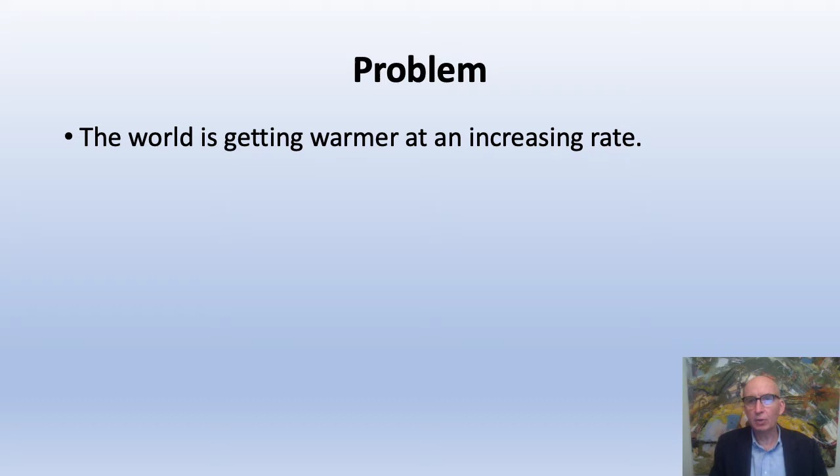The world is getting warmer at an increasing rate. Shown next is a short video segment that illustrates how the warming trend is correlating with rising atmospheric CO2 levels, and that these levels are continuing to rise at an increasing rate.

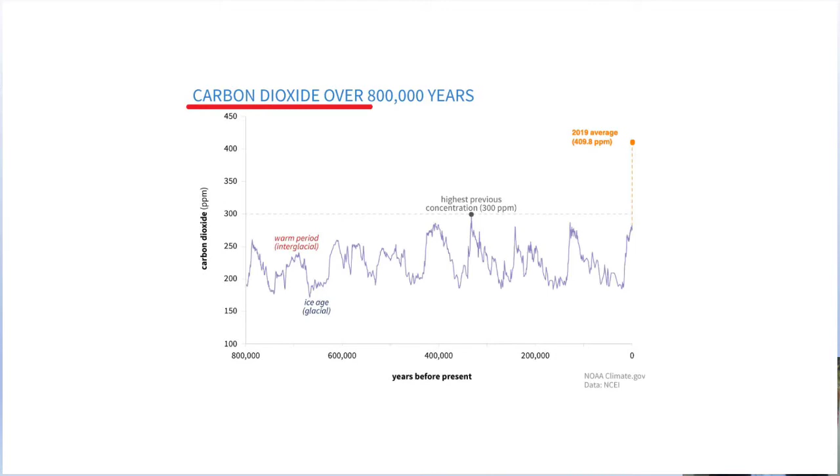The world is getting warmer and at an increasing rate. A large reason for this is CO2 levels in the atmosphere. Since the beginning of the Industrial Revolution, they have risen at an unprecedented rate. Rising CO2 levels have been correlating closely with rising global temperatures since 1880.

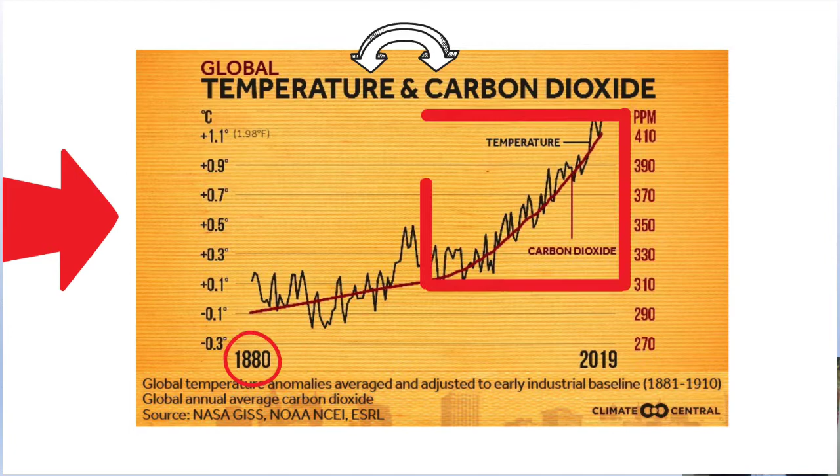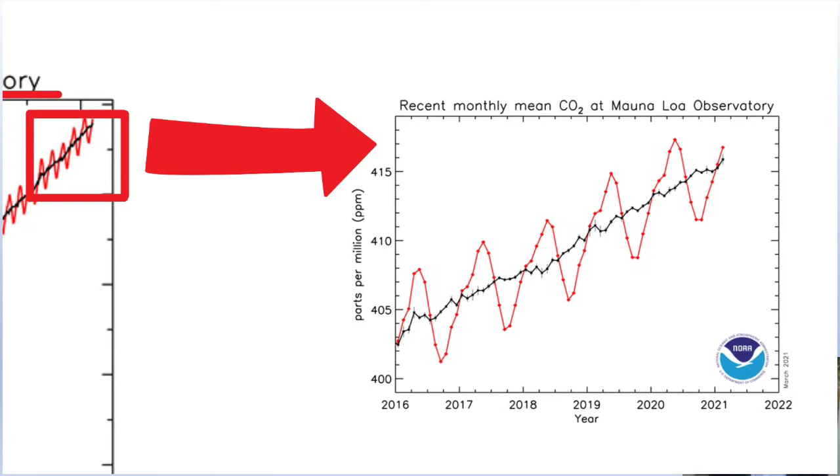This graph shows rising CO2 levels on a shorter timescale as measured at the Mauna Loa Observatory in Hawaii. On an even shorter timescale, you can see average CO2 levels have continued to rise despite a global economic slowdown from the coronavirus pandemic, which is shown by the black line. The red line on this graph shows the seasonal variations.

Why are these CO2 levels continuing to rise at an increasing rate? There are several factors contributing to this rising CO2 levels, but the main reason for this rise is that the total overall global energy demand appears to be increasing faster than the renewable energy generation growth rate.

Therefore, carbon emissions need to be mitigated on a much larger scale than what has been occurring. In addition to expanding carbon-free energy generating solutions as fast as possible, the world needs to implement carbon capture from existing fossil fuel energy sources on a very large scale.

Fortunately, there is now a proven breakthrough technology that captures 100% of the CO2 created when generating power from fuels such as natural gas, biogas from landfills, syngas from coal, and diesel fuel. It is called the Allam cycle.

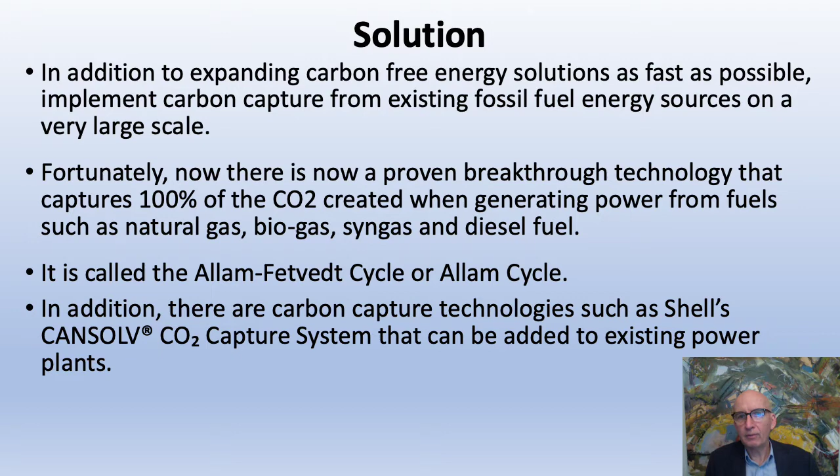In addition, there are additional carbon capture technologies such as Shell's CANSOLV CO2 capture system that can be added to existing power plants. The captured CO2 can be utilized for a wide range of uses, including vertical farming, as well as being sequestered in the ground.

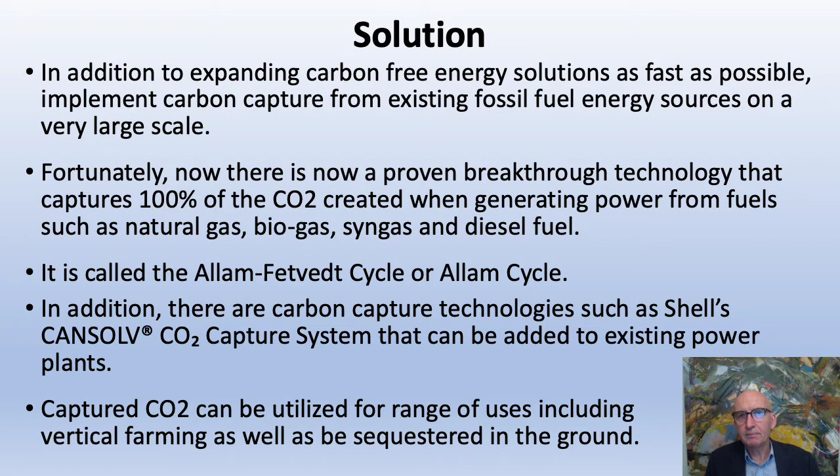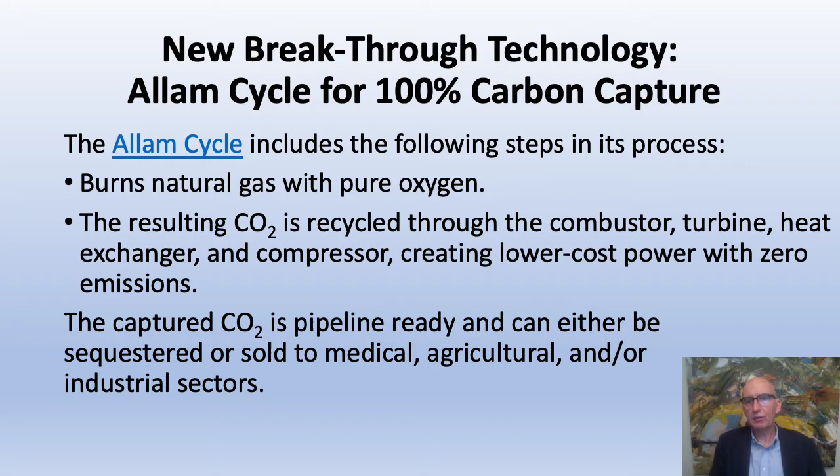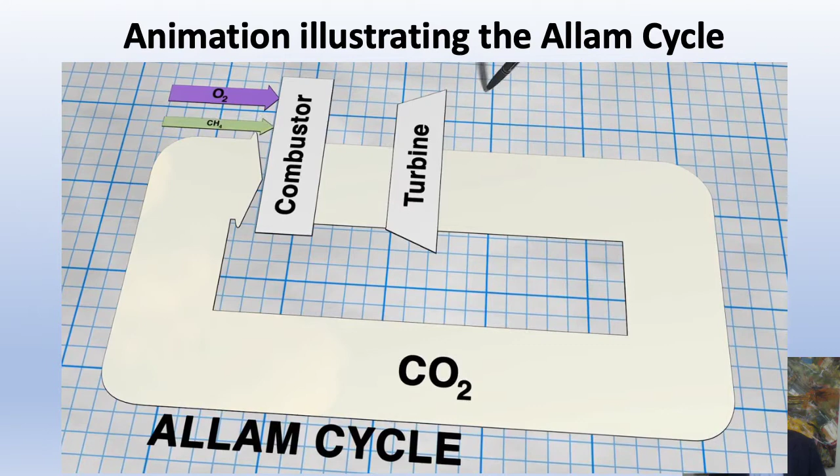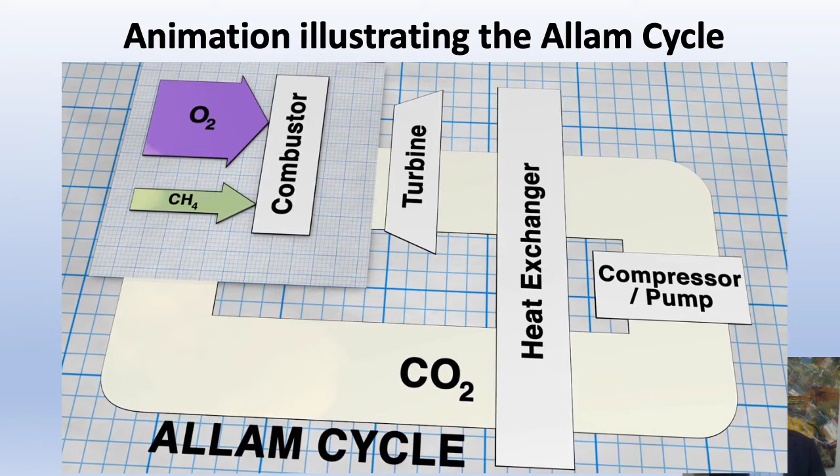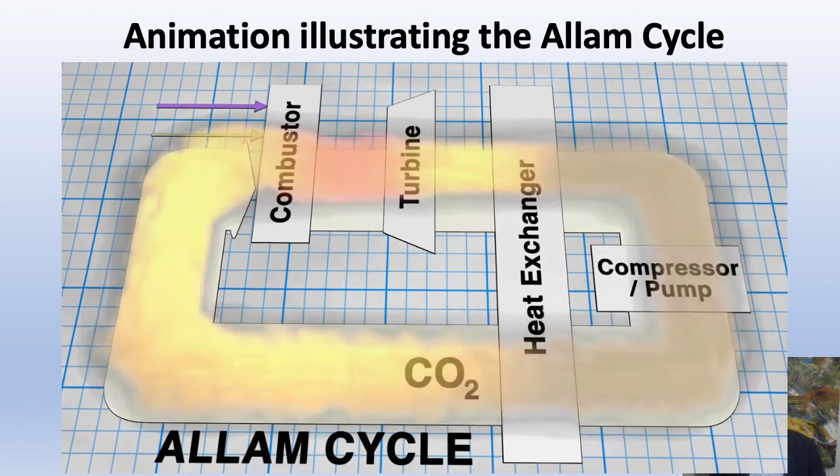Net Power uses supercritical CO2 instead of steam to produce power. Natural gas is combusted with hot, recuperated CO2 and oxygen, preventing NOx production. Burning with oxygen, known as oxycombustion, is typically uneconomic because oxygen is expensive to produce. Net Power overcomes this problem by recuperating the majority of the produced CO2 into the combustor, dramatically lowering oxygen requirements.

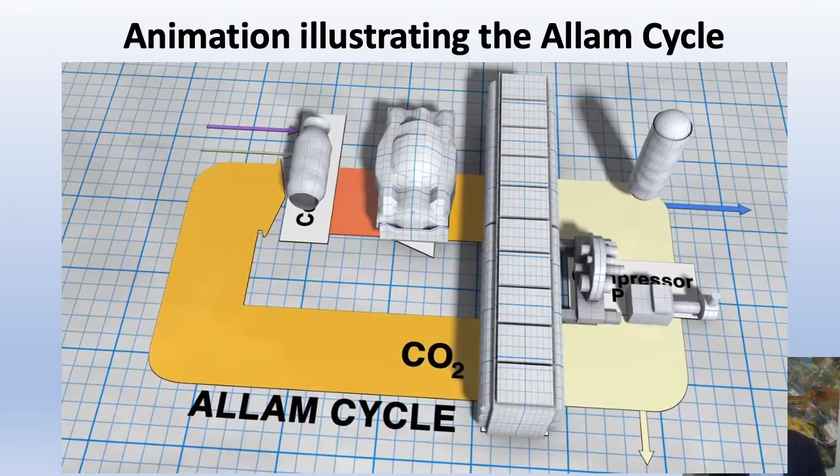The resulting working fluid of high-pressure CO2 and water is expanded through a turbine and then cooled in a heat exchanger. Water is removed, and the remaining nearly pure carbon dioxide stream is compressed and pumped back to high pressure. Excess pipeline-ready CO2 is exported before the working fluid is reheated in the heat exchanger and returned to the combustor. This breakthrough process produces low-cost electricity, eliminates water consumption, and is emissions-free.

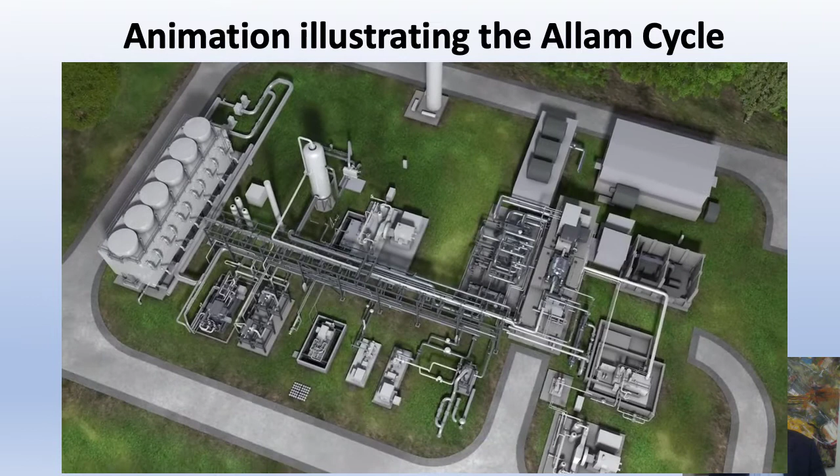The Allam cycle can be implemented on a global scale relatively quickly for several reasons. First, companies around the world can license this technology from Net Power, which is a privately held technology licensing company. The owners of this licensing company have considerable experience, capacity, and credibility in the power generation industry, which include Exelon Corporation, McDermott International Limited, and Occidental Petroleum, or Oxy.

Lastly, equipment manufacturers and contractors around the world that are currently supplying, constructing, and/or operating conventional power plants can also build and operate the Allam Cycle Power Plants. Therefore, capacity exists for rapid large-scale implementation of this cycle starting now.

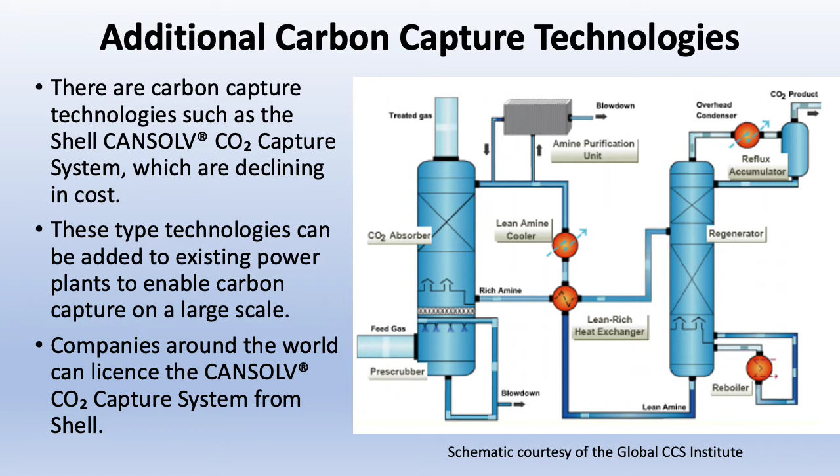As I mentioned earlier, there are carbon capture technologies such as Shell's CANSOLV CO2 capture system. This system is now in use in many locations and is declining in cost. It can be added to existing power plants to enable carbon capture on a large scale. In a similar way as the Allam technology can be utilized, companies around the world can license the CANSOLV system from Shell. Initially, CO2 captured from these power plants would be mostly sequestered in the ground.

However, once there is a reliable source of low-cost CO2 available, this CO2 can be used for many other uses, including accelerating plant growth in indoor farms, strengthening concrete building materials, and production of carbonated beverages. There are several sequestration options for CO2 captured from power plants, including injecting CO2 into oil and gas fields, into basaltic formations, and into salt caverns.

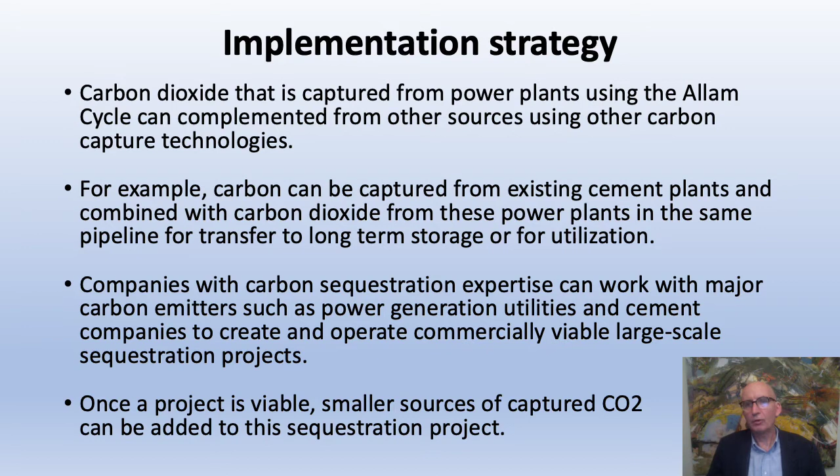Carbon dioxide can be captured from power plants using the Allam cycle, complemented by other carbon capture technologies. For example, carbon dioxide can be captured from existing cement plants and combined with carbon dioxide from power plants in the same pipeline for transfer to long-term storage or for utilization. Companies with sequestration expertise can engage with major carbon emitters such as power generation utilities and cement manufacturing companies to create and operate commercially viable large-scale sequestration projects. Once a project is viable, smaller sources of captured CO2 can be added to this sequestration project.

Power plants combined with carbon capture can help make an electricity grid that is also powered by renewable energy farms more reliable. For example, if wind power is not available for a few days, these power plants can provide the needed electricity. Since a power plant using the Allam cycle is very efficient and captures 100% of the carbon dioxide created, it can also be used during low demand periods to power direct air capture of carbon dioxide from the atmosphere. If this was done, this power plant would have a significant negative carbon footprint.

There are some impressive new technologies coming available to enable low-cost carbon capture from the outside air. For example, Carbon Engineering has developed an effective way of doing this and has made considerable progress in reducing the operating cost of this process.

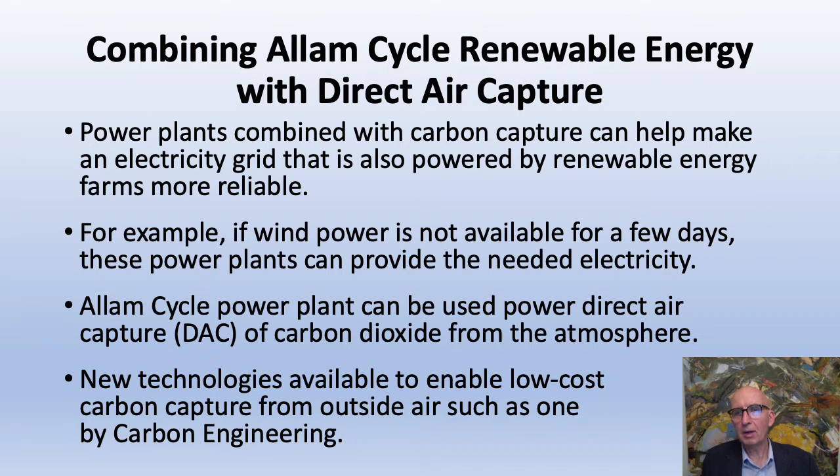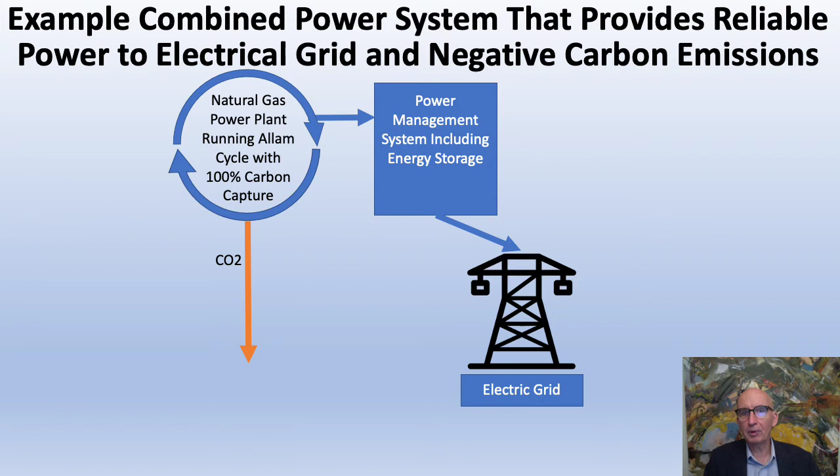Shown here is an example of a combined power system for maximum reliability with negative carbon emissions. The natural gas power plant running the Allam cycle enables 100% carbon capture and delivers power to the power management system. This power management system is also supplied with electricity from wind and solar farms. To help manage the power more effectively, this power management system includes energy storage to manage short-term power peaks and shortfalls.

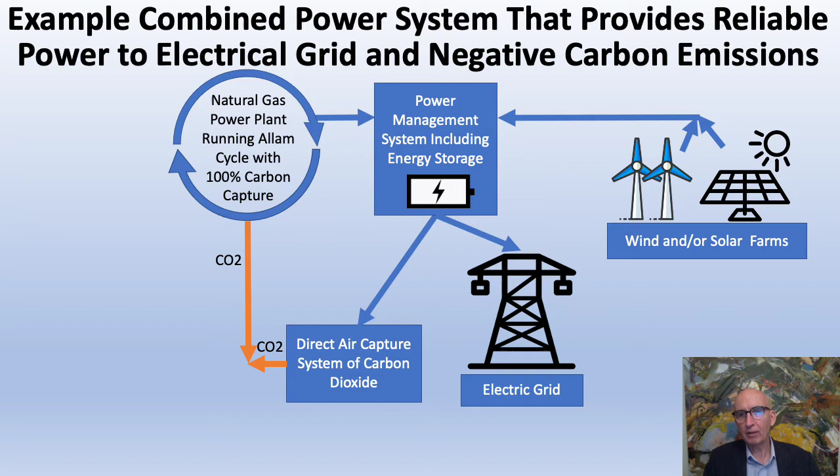If a substantial amount of power is reduced for a long period of time, such as if there is no wind power for a few days, the power management system reduces the power to the direct air capture system of carbon dioxide. In this way, the power management system can maximize the reliability of the power to the electric grid. The carbon dioxide that is captured from the power plant or direct air capture system can be utilized in beneficial ways, such as accelerating growth of food in a vertical farm, or be sequestered in the ground.

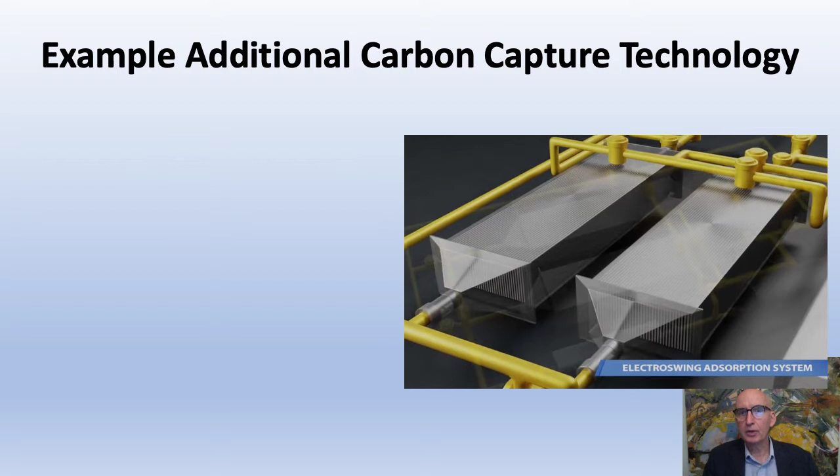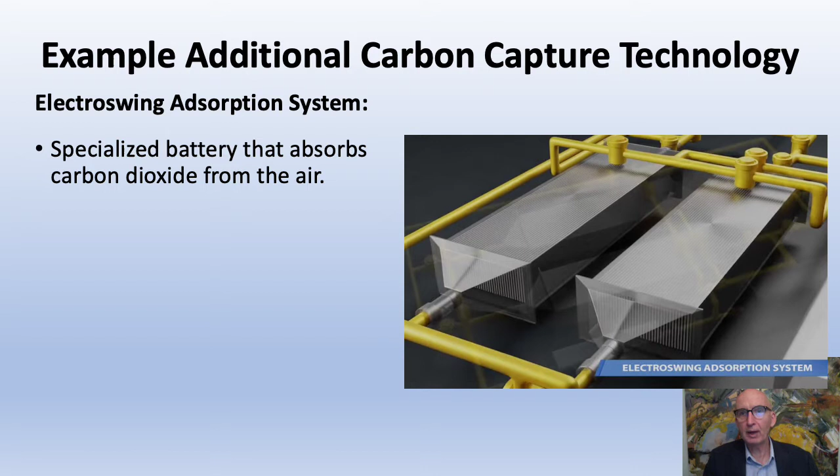There are several other carbon dioxide capture systems available or under development. Shown here is a very promising one called the Electroswing adsorption system that is being developed by MIT. It is essentially a large specialized battery that absorbs carbon dioxide from the air or other gas stream passing over its electrodes as it is being charged up, and then releases the gas as it is being discharged. In operation, the device would simply alternate between charging and discharging, with feed gas being blown into the system during the charging cycle and then pure concentrated carbon dioxide released during the discharging cycle.

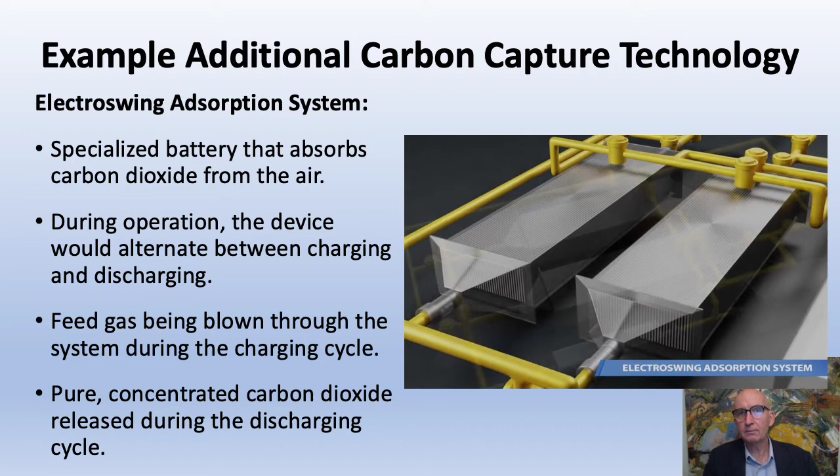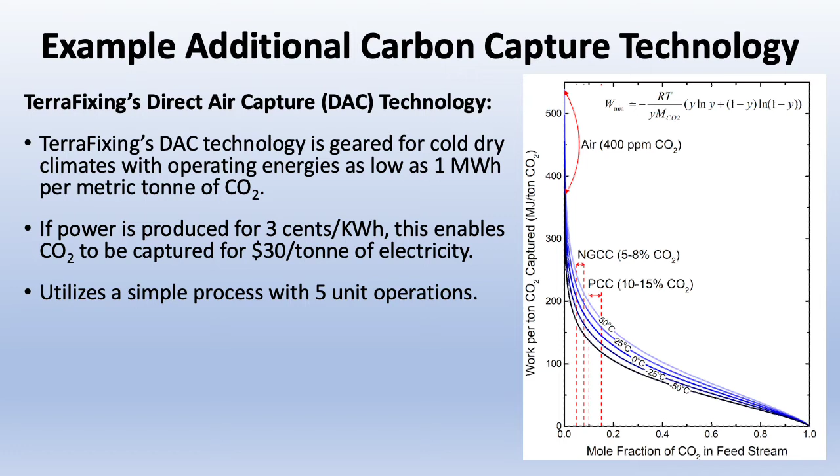Another very promising technology is TerraFixing's direct air capture, or DAC, process, which works most efficiently in cold, dry climates. In this type of climate, it can capture about 1 metric ton of carbon dioxide with 1 megawatt hour of electrical power. If power is produced for 3 cents per kilowatt hour, this enables carbon dioxide to be captured directly from outside air for about $30 in electricity, which is very economical. This technology can do this since it utilizes a simple process with only 5 unit operations. To help keep costs low, it uses proven materials and operates at moderate temperatures and pressures.

There are several areas in the world where it can operate efficiently, including Canada, Norway, Alaska, Russia, Finland, Greenland, the Tibetan Plateau, and Antarctica.

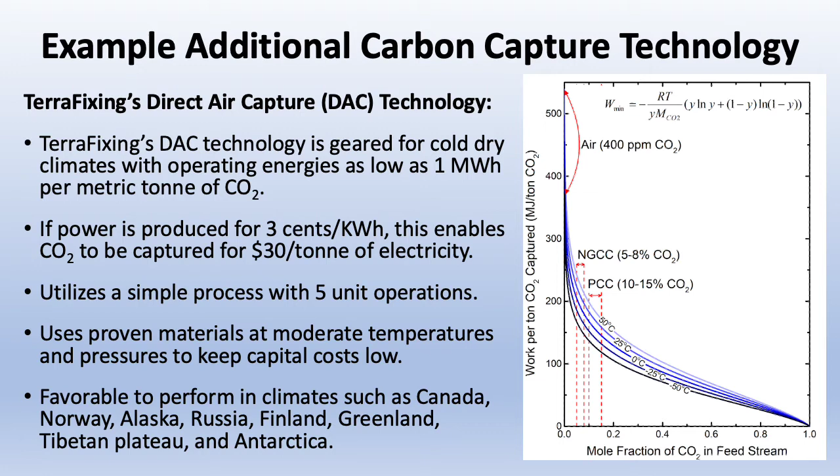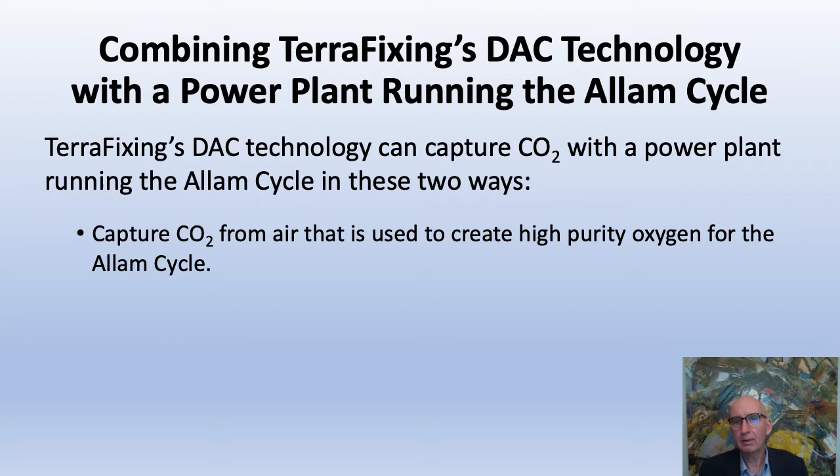TerraFixing's DAC technology can capture CO2 with a power plant running the Allam cycle in two ways. First, capture CO2 from the air that is used to create the needed high-purity oxygen to operate the Allam cycle. This can be done very efficiently since it would be integrated with the process to create this high-purity oxygen.

Second, capture the CO2 through the normal DAC process. As indicated earlier, this process will require only about 1 megawatt-hour per metric ton of CO2 captured when done so in cold climates, which is very economical.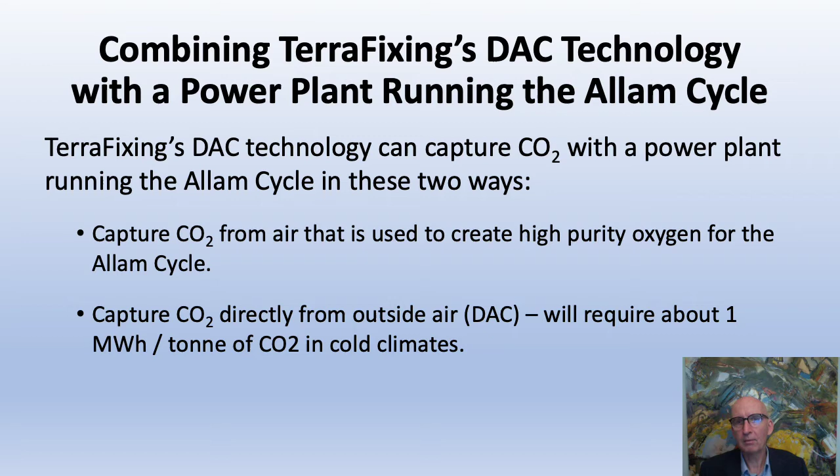A 300 megawatt power plant is estimated to be able to power the capturing of approximately 7,200 metric tons of CO2 per day, which translates into about 2.6 million metric tons of CO2 per year. As an added bonus, a vertical farm can be included to supply fresh organic food to feed the local families. The net result of this type of special purpose power plant would effectively be millions of tons of negative carbon emissions.

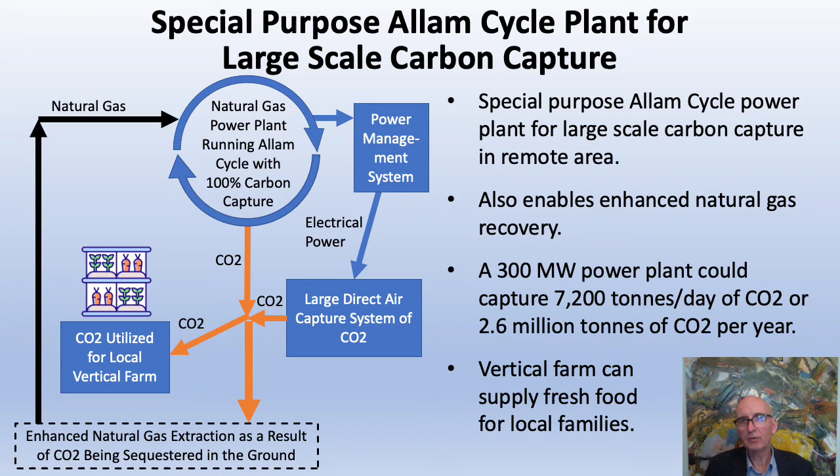Therefore, the potential impact of combining an Allam Cycle Power Plant with TerraFixing's direct air capture technology is very large and can be implemented in many areas of the world. More specifically, these power plants can be located anywhere in cold climates where there is appropriate geological formations for carbon sequestration and enhanced natural gas recovery.

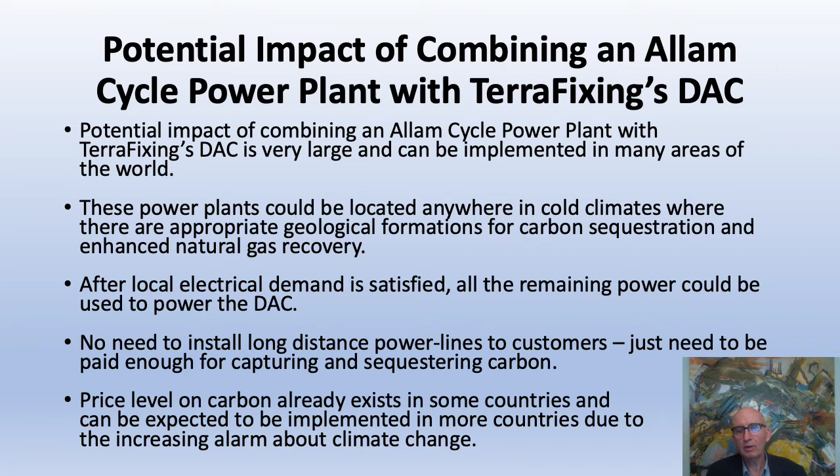After local electrical demand is satisfied, all the remaining power could be used to power direct air capture. Therefore, there is no need to install long-distance power lines to customers. There is only need to be a price on carbon that is high enough to cover the cost of capturing and sequestering carbon. This price level on carbon already exists in some countries and can be expected to be implemented in more countries due to the increasing alarm about climate change.

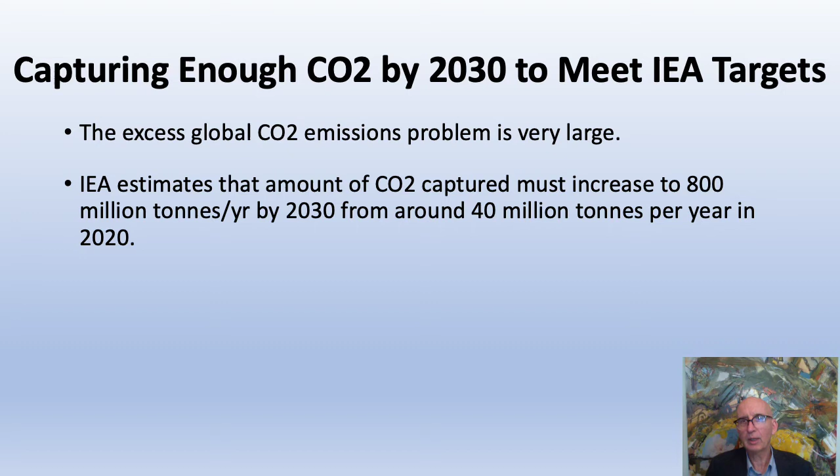The scale of the global CO2 problem is very, very large. For example, the International Energy Agency estimates that the amount of CO2 captured must increase to 800 million metric tons per year in 2030 from around 40 million metric tons per year in 2020.

As indicated earlier, a 300 megawatt plant can power the capturing and sequestering of about 2.6 million metric tons of CO2 per year. Therefore, a 1 gigawatt plant could capture and sequester about 8.5 million metric tons of CO2 per year. To capture and sequester the remaining 760 million metric tons of CO2 per year, approximately 90 of these 1 gigawatt power plants would be needed.

If this combined power system was implemented in many locations around the world, the scale of the impact on reducing carbon emissions would be extremely large, likely in the range of billions of tons of CO2 per year.

Typically, green bonds are issued once a project is operational and generating income, so bridge financing is normally needed to construct and commission these combined power systems. This bridge financing normally includes at least two components. The first is the equity component that is provided by the owners of the project and the respective investors. The second component is a bank loan by one or more financing institutions like the Canada Infrastructure Bank.

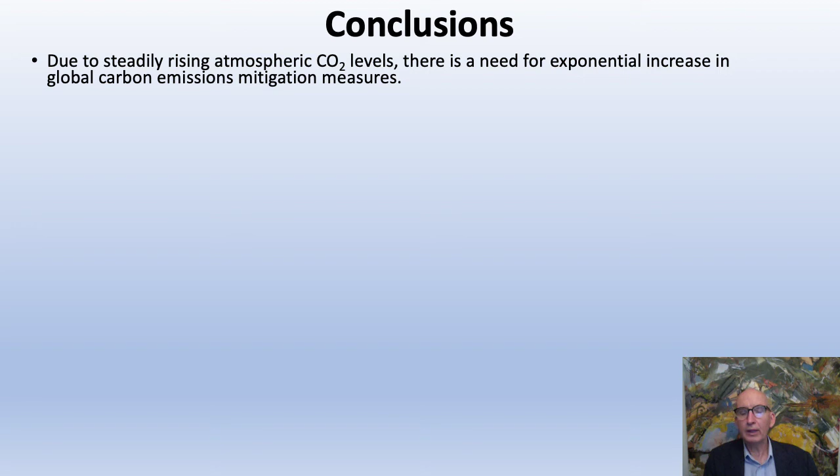In conclusion, due to steadily rising CO2 levels, there is a need for an exponential increase in global carbon emissions mitigation measures. There is now a proven breakthrough technology that captures 100% of the CO2 generated when generating power from fuels such as natural gas, biogas, syngas from coal, and diesel fuel.

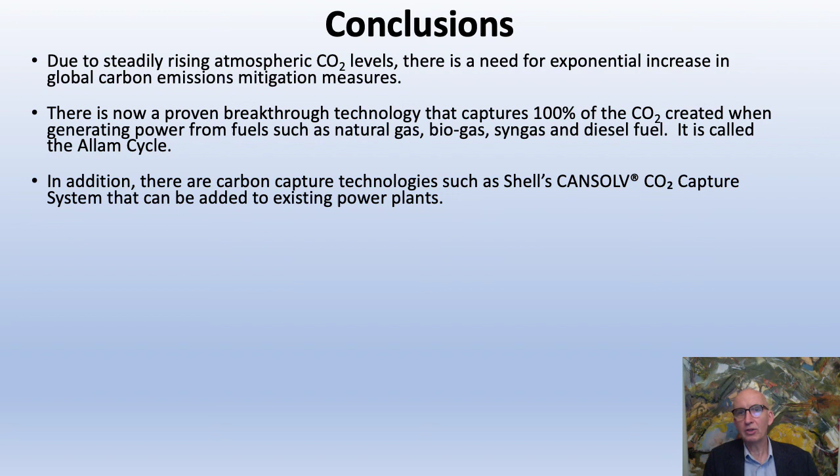It is called the Allam cycle. In addition, there is carbon capture technology such as Shell's CANSOLV capture system that can be added to existing power plants. The CO2 captured can be utilized for a range of uses, including vertical farming, as well as sequestered in the ground. Power plants with carbon capture can be combined with renewable energy farms to produce more reliable power to the electric grid and generate negative carbon emissions.

This solution can be financed on a global scale with green bonds purchased by firms that have joined the Glasgow Financial Alliance for Net Zero, which have a combined total of over $70 trillion under management. This solution helps governments, companies, and workers that depend on income from fossil fuels to profitably transition to a low-carbon economy, which is critical for their support.

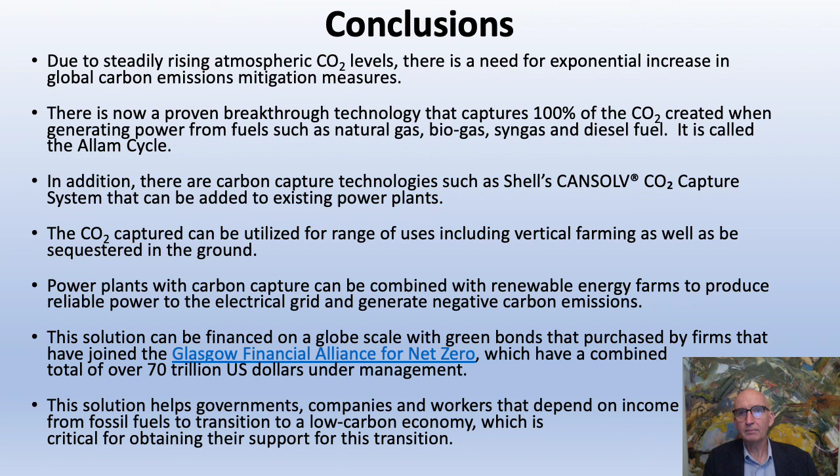To help catalyze the implementation of this opportunity on a global scale, we recommend the following. First, invite independent groups such as Drawdown and the Center for Climate and Energy Solutions to work together to estimate the full potential impact of implementing this opportunity on a global scale.

Since organizations like IEA have already estimated the potential impact of some carbon capture technologies, this estimate can build on work already completed and take into account the latest technologies and strategies to accelerate carbon capture and storage globally.

Second, inform companies in the oil, gas, power plant, solar energy, wind energy, and energy storage sectors about this opportunity, which can bring them many billions of dollars of funding.

Third, inform financial institutions that facilitate the issuance of green bonds of this opportunity, which will likely enable them to generate hundreds of millions of dollars in fees doing this work.

Lastly, respond to the recently published concerns about carbon capture, utilization, and storage by about 500 organizations to help build broad-based support to implement this opportunity on a global scale.